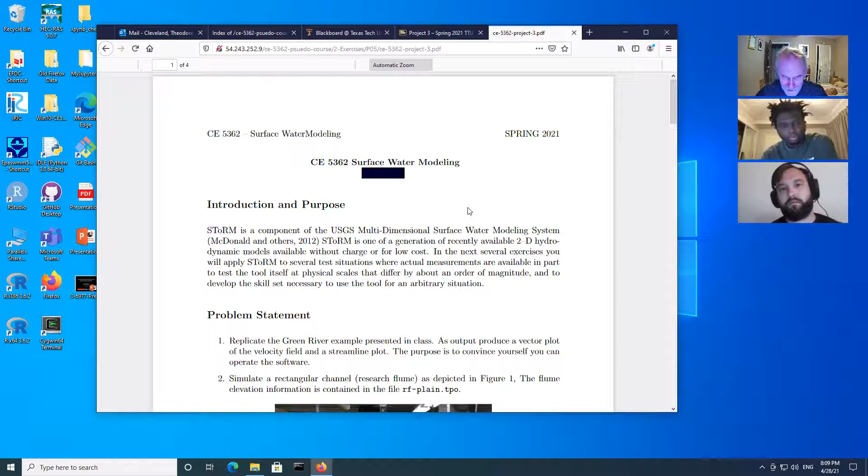So here's the problem statement. I showed you this before, but I've got the date correct, and I have the accounting number correct. So the first thing to do is to replicate the Green River example. And I would suggest not only replicating what I've done in class, but actually replicate the example on their tutorial where they cut the island out, just so you know how to do that. And the purpose of part 1 is to convince yourself you can operate the software.

We had a sequence of things to do. Hopefully I can find it. Oh, rats. Where did I put it? There it is. Dr. Cleveland? Yeah, the protocol for building a SToRM model. There it is. I put this on the look down thing so it gets captured on the video.

Dr. Cleveland? Yes, so I tried doing the tutorial for the Green River. Yes. I wasn't able to do the island stuff. Okay, because I don't know, it doesn't have the cutout in it. I'm not surprised that you can't do it because the software has changed. Yeah, actually. Because they were saying we should use create mesh something, and I couldn't find it, so I couldn't do it. Okay, well, we'll try to take a look at that in a second.

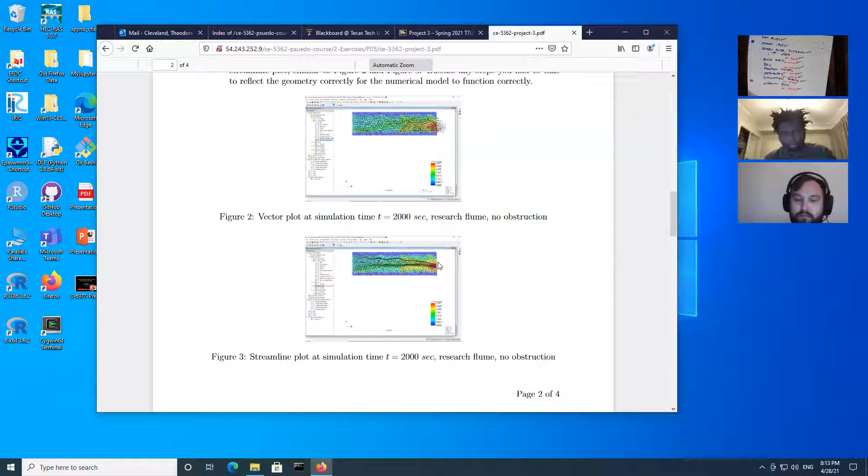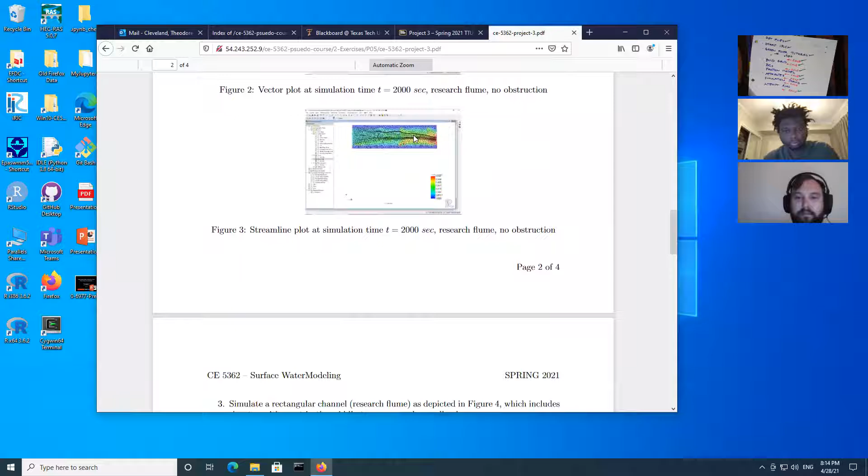And then the second picture down here is showing streamlines. So when you download it, you can zoom in on these. I don't know how to zoom in because I'm doing it in Windows, which doesn't have an Acrobat viewer. And here they are at a couple of different simulations. 2,000 seconds in the research flume should be plenty of time to come up to a steady state. The research flume is only 12 meters long, so that's plenty of time for everything to do its thing.

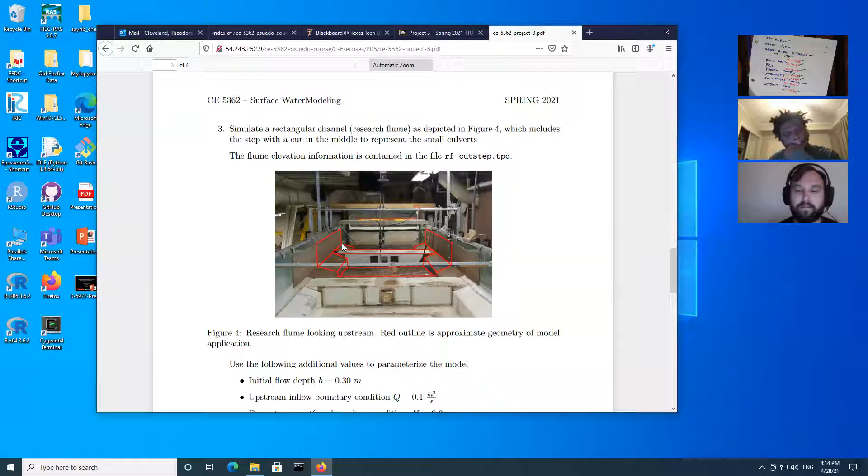And then the next part is to repeat it, except now this obstruction is placed in the way, and to represent the three culverts, because of the way the SToRM model works, this portion is cut out. So imagine it goes like that, drops down, comes here, comes back up, and goes over to the right. And so what you have is a wide portion of a channel, narrow portion, and wide portion. Some additional information for that, and the topographic file is called rf-cutstep.tpo.

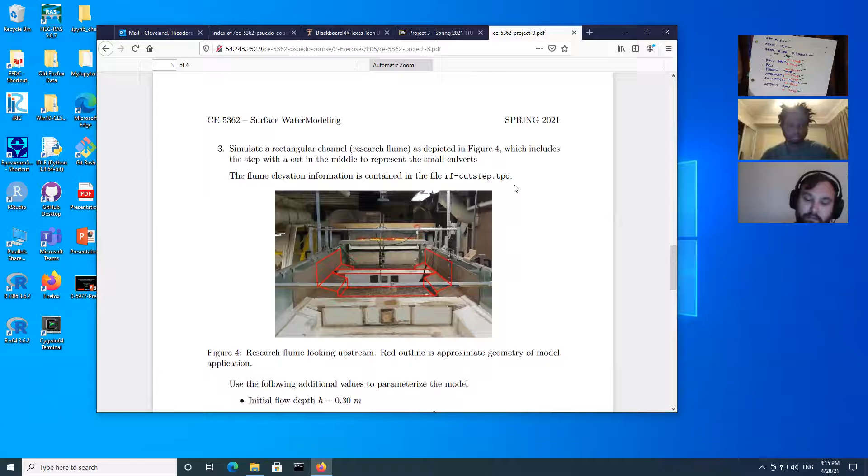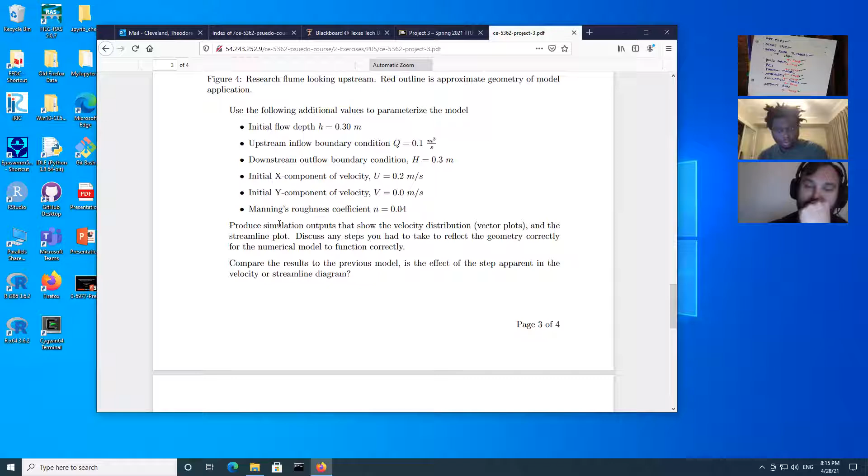And then do the same kind of outputs as before and verbally discuss the difference in the two outputs. So is there an effect of the step on the velocity or not? And so here it is with the step. You should be able to detect an effect of having that step in there.

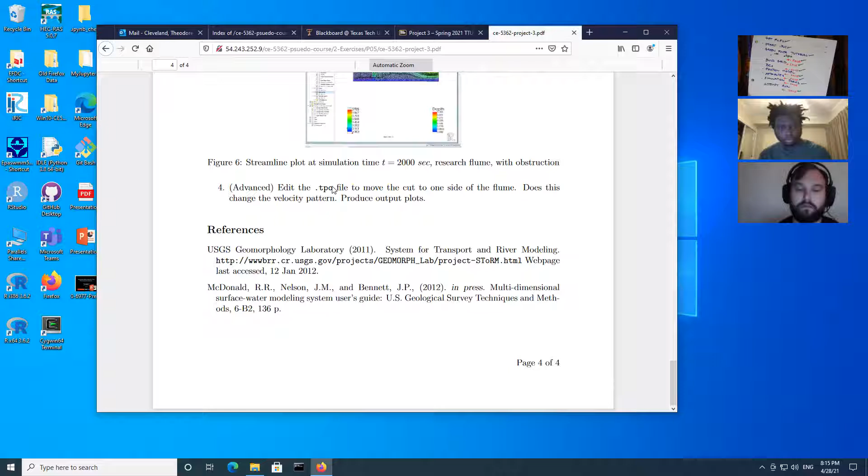And you are free to choose whether to do the advanced thing or not, because we don't have much time left this semester, but it's possible to edit the file, and you can move the cutout from the center to one side of the flume and rerun the simulation. It changes the appearance of the output, and what that does in effect is it's how I would actually simulate this for a real fluid mechanics problem.

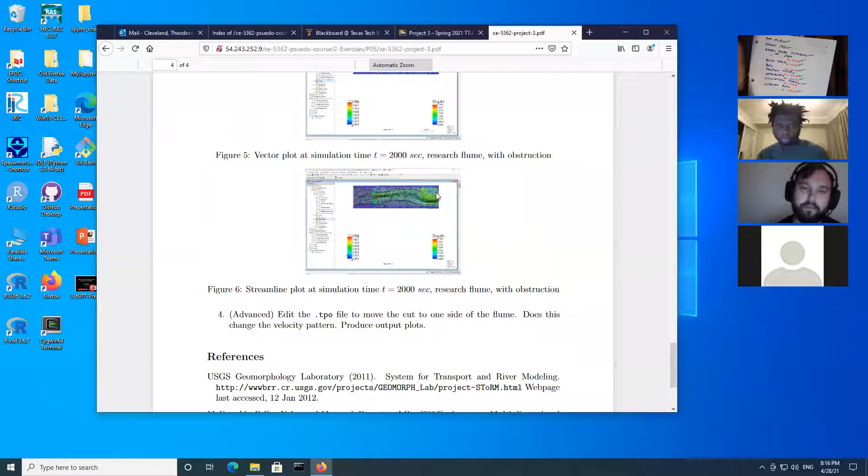We're introducing an axis of symmetry right down the middle, and so we're doubling the size of our modeling regime. 4 is optional. 1 through 3 are what I'm expecting you to be able to accomplish by next week. Okay, is that fairly clear? I'll take silence as a yes, and let's go ahead and be sure that we can do these parts.

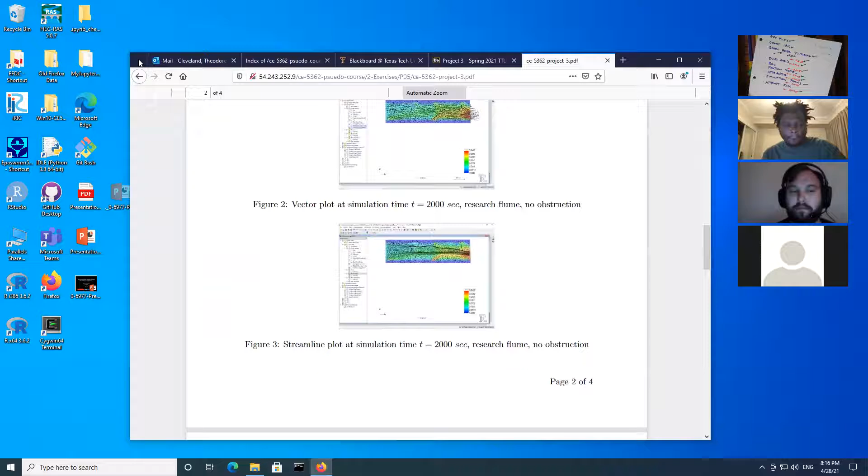So I will return to Anna. By the way, welcome. What I was going through was the third project, which is obtainable on Blackboard, and you upload it here, and it's due on May 10th. We have one meeting next week, and we can use that as a workshop if you give these a try and you're having troubles, and we'll try to fix the troubles.

Okay, so I'm going to do a workshop today to be sure that these data are actually usable, because I did not check that. As I told you all when I started, I was distracted with other things the last couple weeks. No, I will keep the project folders until I know. So first I want to create a new project, choose OK. And I need to download the data. So first I'm going to do rectangular channel.

So rf-plain.tpo, save target as, and let me create a new folder. I apologize for the rather stupid naming, but hopefully that downloaded it. Okay, import. There should be elevation. My rectangle. There's the topographic file. Okay, that looks correct. There should be a way to actually look at each point. Maybe I have to build a grid.

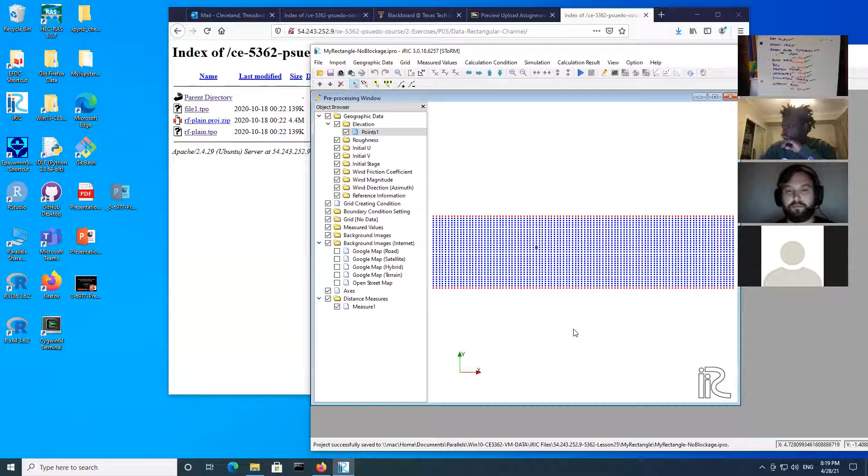So following my algorithm here to the right, I've loaded the topo file. Next thing I want to do is save my file as a project, and we'll call it my rectangle, no blockage. Take it out of context, that's actually a really funny name. Okay, so the next thing is to build a grid. Let me get a little bit more screen real estate. So I'm going to select my algorithm, polygon shape, OK. And I'll define the region.

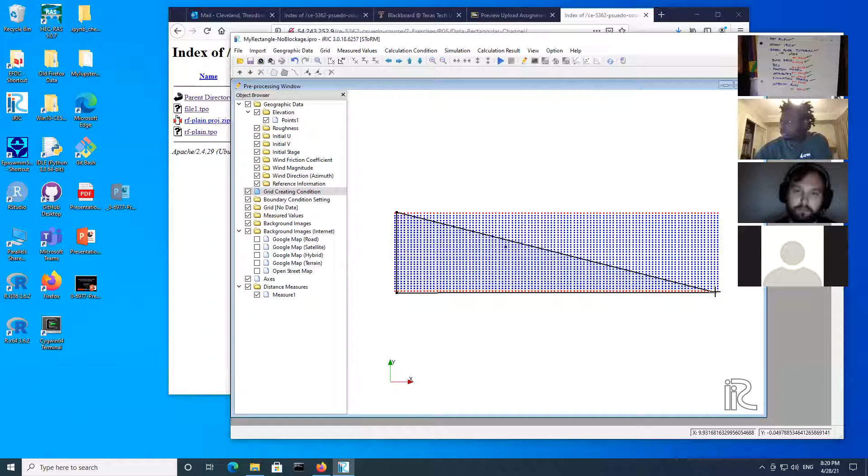Now these red dots correspond to the upper and lower wall, or the left and right wall in the photograph. The program will work a lot better if we include them. And I am intentionally trying to neglect that first column and the last column. Because it's going to do interpolation, we need to give it something to interpolate. So there is my grid. There's no holes in it. We can add a hole. So this is what I think you do to do an island. And that creates a hole. We'll take the hole out in a second.

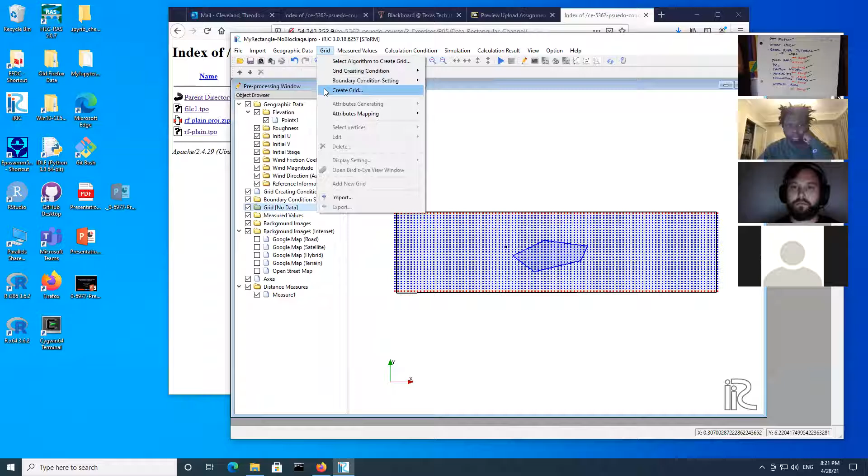Actually, let me see if I can delete the hole right now. Rats. I may be stuck with a hole. We'll do it again in a minute. Go ahead and create the grid. I'm not even going to mess with those just yet. Okay, that's not a very useful grid. I want to get at least 10 cells along the inflow and the outflow boundary. So I'm going to have to redraw my grid. I also want to get rid of my hole if I can. How do I get rid of a hole?

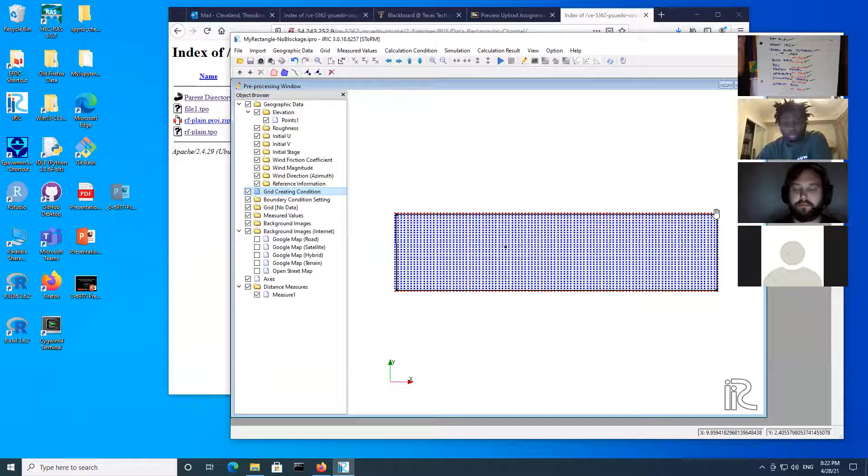Cool. I think that did what I wanted to do. Oh, I guess I'm starting over. My bad. Okay, we'll go ahead and start over anyway. So let me do it correctly. Because it's interpolating, I want to get my boundary just inside my model region. Okay, so there's my rectangular region. Now I want to create the grid. We'll take the initial defaults and see what we get.

I want to count 1, 2, 3, 4. We have four entries along the edge, so we need to make our grid finer. So let's reduce our cell area by a factor of 2. Count again, 1, 2, 3, 4, 5, 6, 7, 8. So we'll reduce it again.

So the reason we're looking for 10, I would love to say it's because I have intimate knowledge that that's what fluid mechanics tells us, but actually it's in the modeling primer that comes from the SToRM website. They're the ones that... so I'm trying to keep my cells as big as I can and get good coverage. 1, 2, 3, 4, 5, 6, 7, 8.

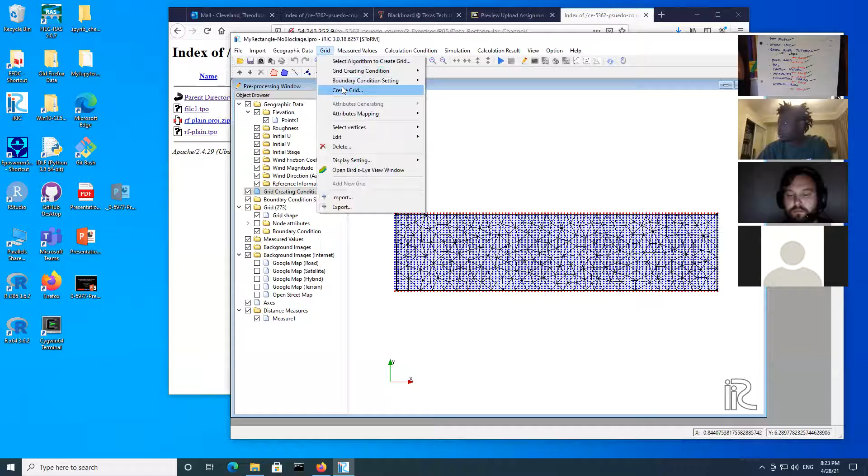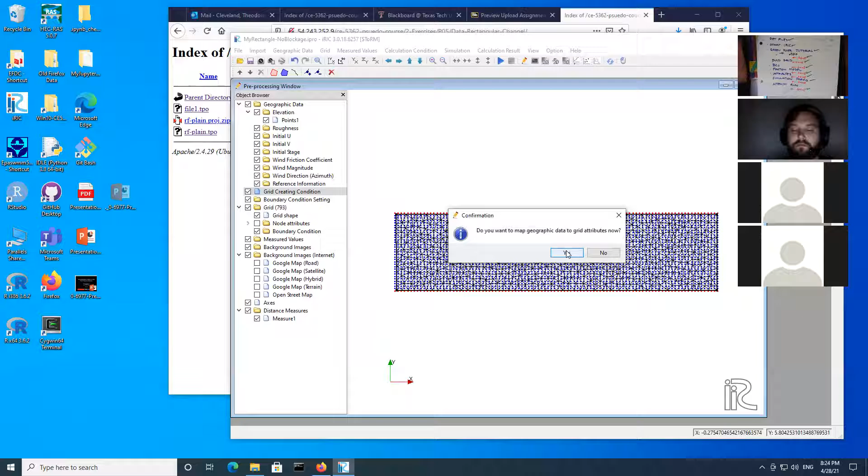One, 2, 3, 4, 5, 6, 7. This thing is really fighting me today. Yay, that's going to be 20. So we'll go with that grid. So there's the grid we're going to use.

The next thing we want to do is boundary conditions. And to do that, we actually probably need to go back to the problem statement. So we're doing step 2 here. So the initial flow depth is 0.3 of a meter. The upstream boundary condition is 0.1 cubic meters per second. I happen to know that this should flow from left to right. But let's verify that.

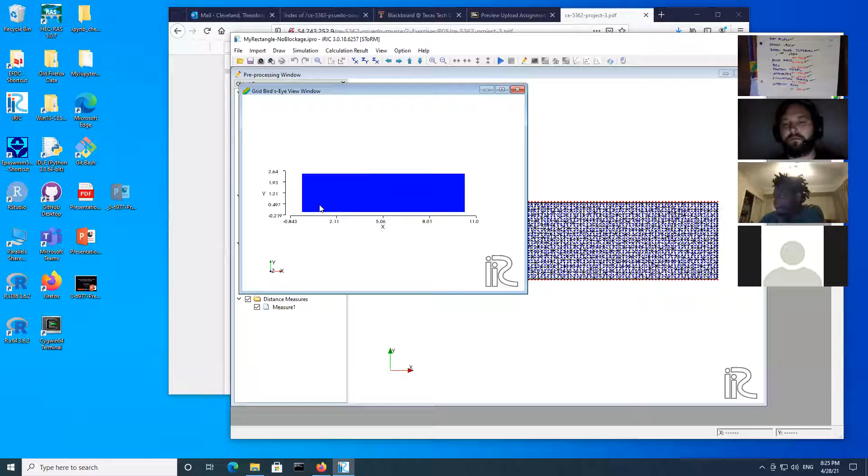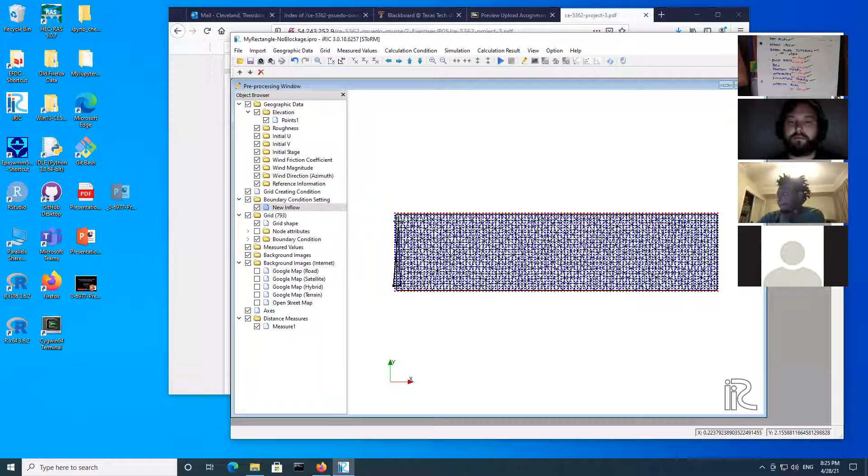I do currently have a bird's eye view window. I'm trying to rotate it so I can see which way is down. I'm pretty sure it's from left to right. So we're going to make this left side our inflow boundary. So to do a boundary condition setting, we go to that and we're going to go to the add inflow. And I'm going to try to miss the corner, but I want to get the interior points. And I'm basing my drawing on the triangles right now. And we want to make it 0.1.

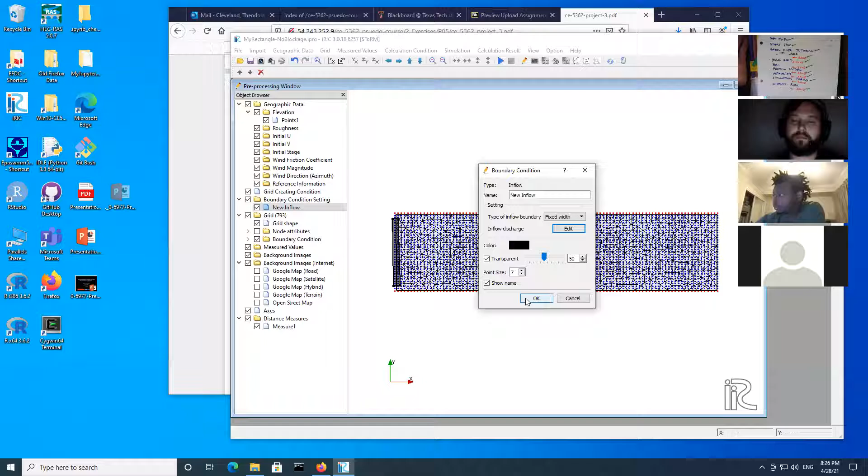So now we will pan over to the other end and we'll put our outflow condition, and then the outflow we're going to specify a flow depth. So we'll go to outflow, and I'm going to play the same game. Zero point. Come on, machine. Downstream outflow condition 0.3 meters.

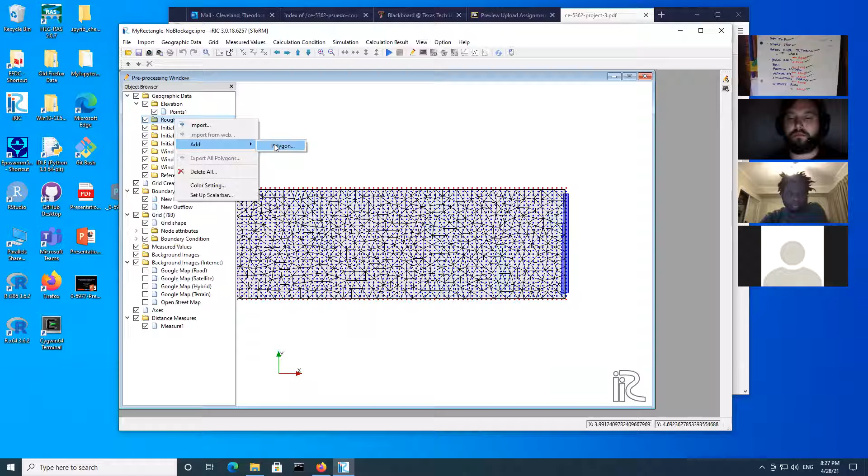So we've got the inflow and outflow boundary conditions, and according to our thing, the next thing we want is a friction model. Zoom out a bit. So I'm going to try to get a friction model more or less coincide. Actually, I guess it doesn't matter because it can interpolate. And let me see what roughness values I want to use. 0.04.

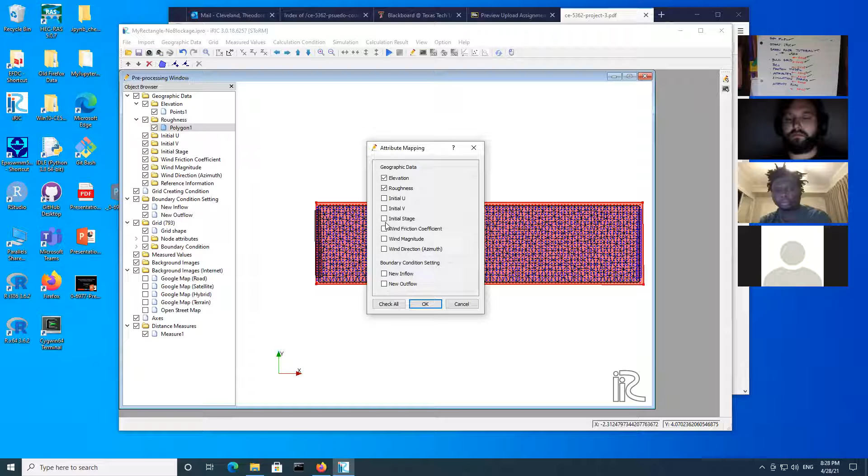So the friction model is there, the boundary conditions are there. I'm going to go ahead and save the work. And then the next thing we do is we map the attributes. So we go back to our grid, we go attribute mapping, and we're going to put elevation and roughness onto the model. We could also put initial stage, which I haven't defined yet. We'll put the inflow and the outflow. We'll click the okie dokie, and it claims it has done it successfully.

And at this point, we're ready to set up some simulation parameters. So let's go ahead and do that. We go into the calculation conditions, and we're going to set up the initial conditions from uniform conditions. We'll go back to our problem statement. So the initial x component velocity is 0.2 meters per second and y is 0.0. So we go to 0.2, 0.0. Water surface elevation is 0.3 meters. We'll leave that as is.

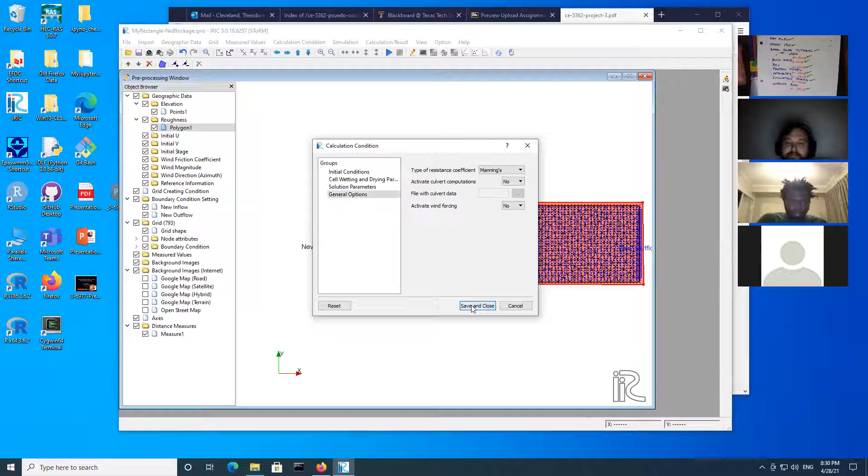This is actually pretty small scale modeling, so we may have to use a fairly small number here. I'm going to try microseconds. I'll do about 100 time steps. I'll plot every 10. This is just to get things up and running, make sure it's going to work. And then general options are fine. And at the time we did the data, the ability to do culverts wasn't coded into the program yet. So I will save everything, and let's go ahead and run a simulation.

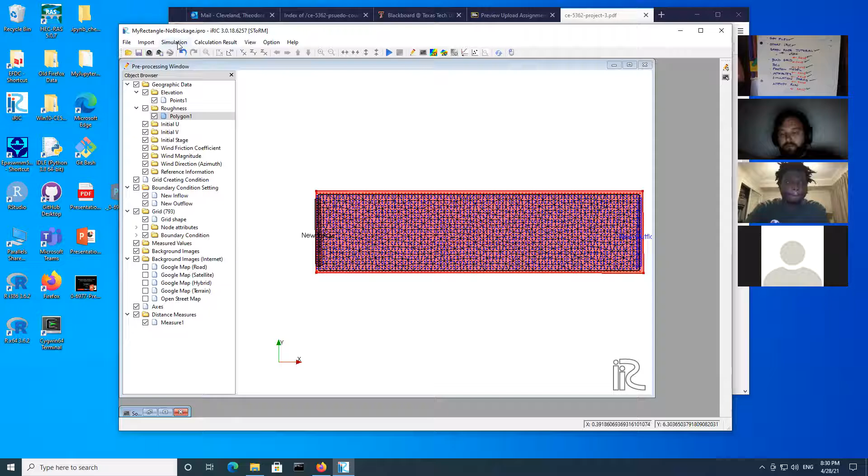Okay, that was a desirable run. 100 time steps of 1 millisecond isn't very much time. That's 100 milliseconds, which is 1 microsecond. Excuse me, 100 microseconds is 1 millisecond. Takes a little bit longer than a millisecond to get from one end to the other of this flume. So now I'll go ahead and, just for grins, we'll go look at the output real quickly.

The velocity arrows are as expected. If we were to rescale, there was the initial velocity condition, and for the first 100 seconds of simulation, it's trying to hit a steady state, but you'll notice that this upper portion and this lower portion have zero velocity because there's no water there.

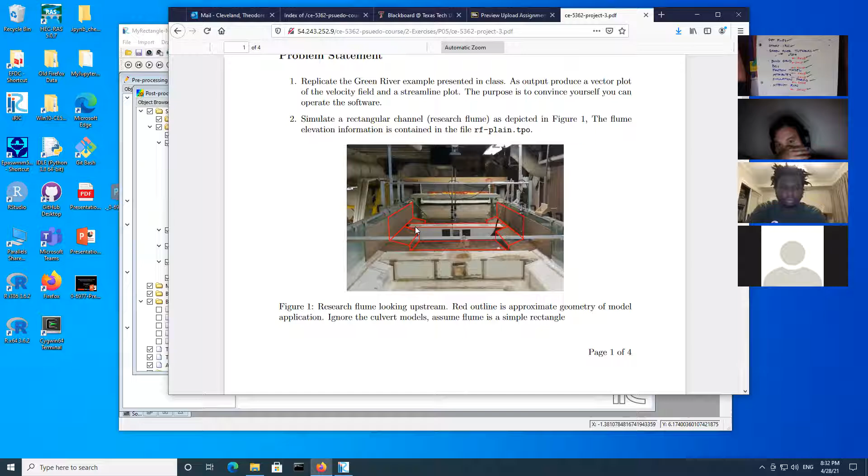If you remember from the photograph, the sidewalls are slanted and then drop down vertically. So at these particular flow conditions, the water is completely contained in the pilot portion of the channel. Going back to the picture, our initial conditions have everything contained between these two walls, and so these benches are not carrying very much flow yet.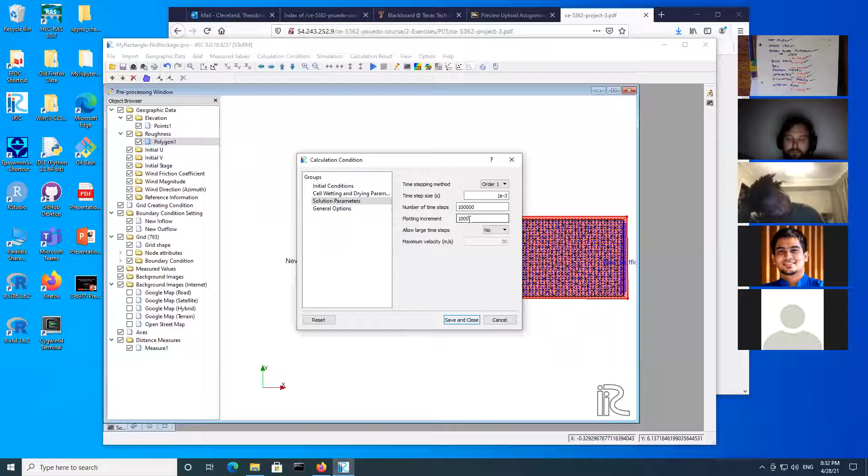So the next thing we would do in this case is modify our solution parameters. I'm pretty sure this is a small enough problem that we can get away with what I'm about to do. That'll be good, and I'll let it run.

And it's grinding away. I may have set up conditions for failure because this number is starting to get high—right now it's at 17, 20. I think it'll make it. I think we'll get to the end.

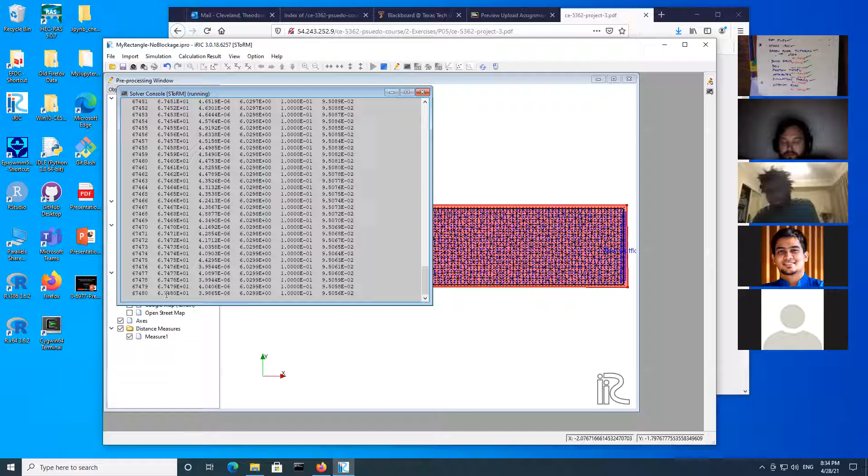When I use this tool a lot, I did a lot when we were doing these experiments, because it lets you visualize computationally the effect of obstructions, things like bridge piers, culverts. You could put circular objects in it and visualize the flow field. Then we went to the laboratory with an underwater camera and other visualization techniques, including the highly sophisticated thing of putting food coloring in the flow field. We confirmed that the computational visualization and what we could see in a real experiment were remarkably close—close enough that in relatively simplistic geometries, I have faith that the SToRM program produces adequate visualization of what the flow fields look like.

I wouldn't trust my life on the numbers, because only a fool does that, or an astronaut. But I was able to convince myself that the tool is actually what it says it is.

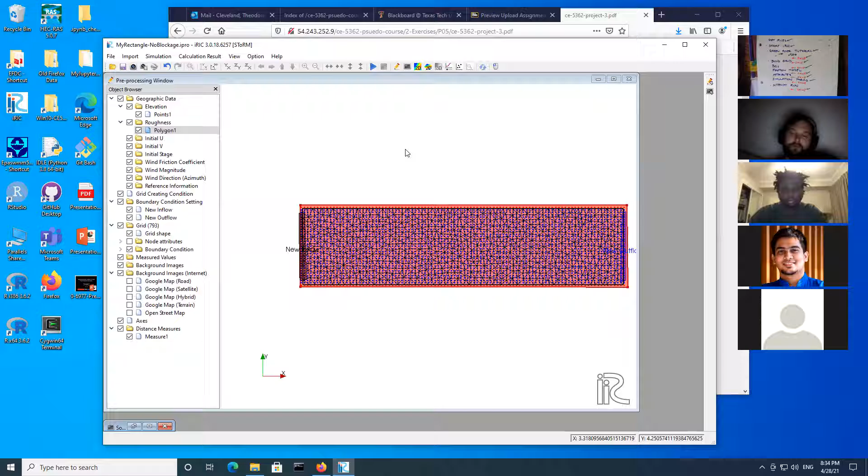Okay, so I've simulated—I think I've done 1.5 simulated minutes, and I know for a fact that even at a flow of 1 foot a second in that particular flume, it would only take 48 seconds to transit the flume. So I'm pretty sure that we are at a position where we would indeed have a resolved solution. Let's first just look at some interesting, pretty stuff.

There's the water surface elevation, and where it has high numbers is essentially our dry cells. Down here in the dark blue region, somewhere around 0.3, it's a little higher than 0.3 meters, which is about correct for those conditions.

If I turn on the bed shear stress, the image should look the same as the one I just showed, and most of the bed shear is going to occur in the center line of the channel. And sure enough, it does. We have the highest shear actually near the end of the channel, so the water is squirting along here and starting to pile up at this end. If we had the ability to resolve velocity down here, we'd see it's slightly slower on the right end than on the left end.

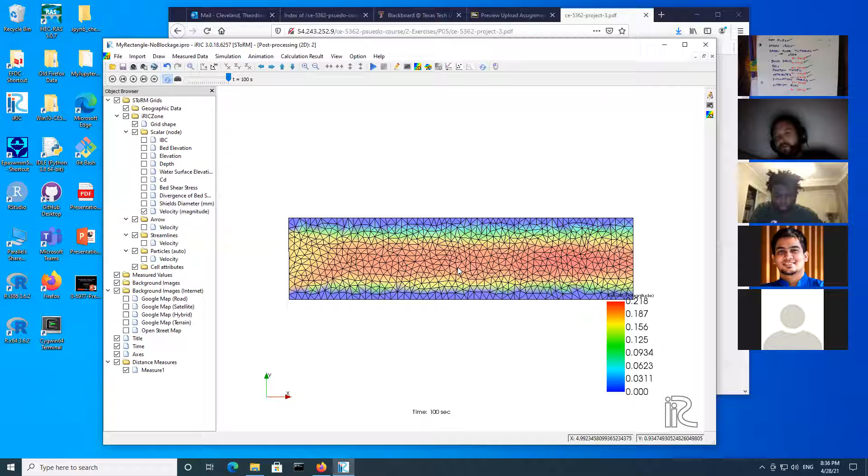We could turn on velocity magnitude, which is the square root of the sum of the squared velocities, and we should almost deduce the same thing. It's barely detectable in this imagery, but it's faster here on the left than it is on the right.

Let's go ahead and get the velocity arrows, because that was the whole point of this study. If we choose the property, let's just shorten these arrows, so 0.1 meters per second is going to be represented by 100 pixels.

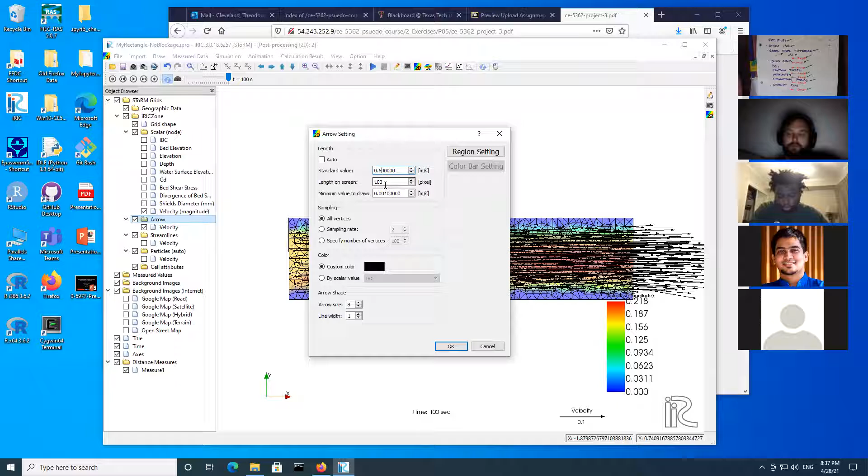Okay, that's what I wanted to see. And actually, turn off the grid. So there's my velocity field at 100 simulated seconds.

We'll go ahead and run the time steps through, but keep in mind what's happening: we've produced an initial condition that may or may not be an equilibrium solution, and so the time step algorithm is working through time until things stop changing. Actually, that happened remarkably fast—it was doing that last time, wasn't it? Boy, I hope I saved everything.

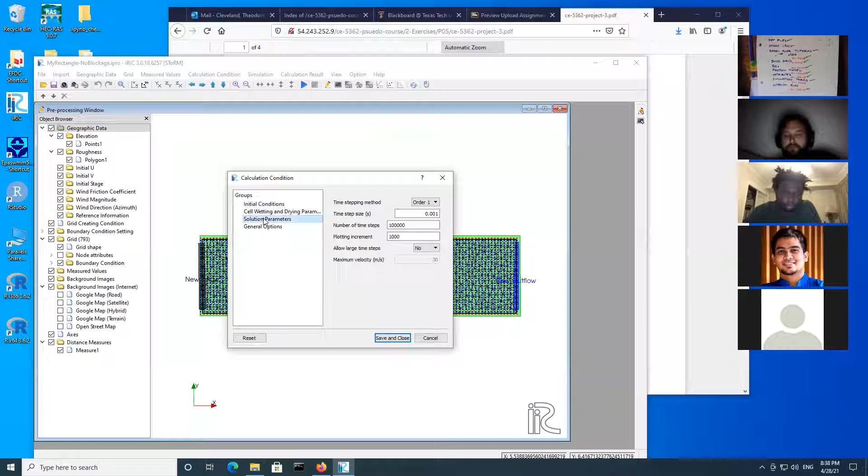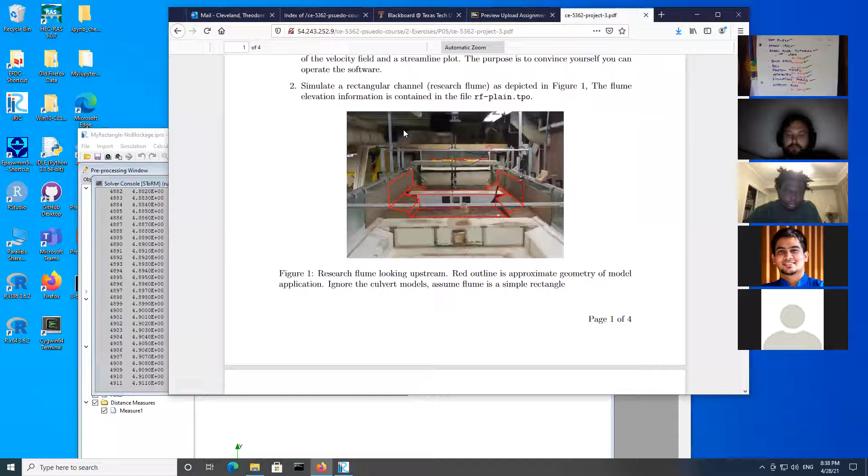Okay, this time I'll do it correctly. I'll let it run in the background. And while that's backgrounding, I'll look at the second case. So the second case is going to take very similar information. When it's done, we'll figure out how to do the streamlines and the particle tracking.

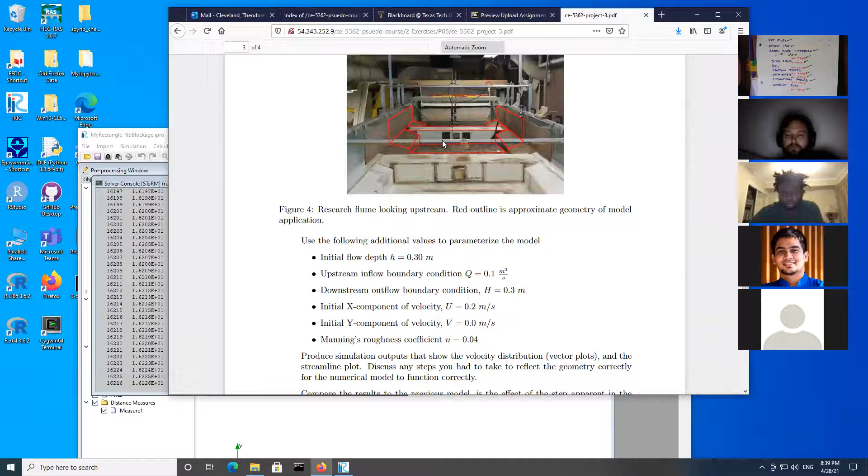The second case is the same thing, except now this object is in the way. Nothing changes in terms of the x and y component of velocity. So one of the tricks we're about to explore is if we can just make a duplicate of the project and then change the topo file that it uses.

We'll be there, we're 40% done with the simulation. And that is all that project for homework involves. So let me get this thing done.

Come on, don't crash. Well, it didn't crash last time, so why would it crash this time? What could have possibly changed except for a few minutes of our lives? I say that with a necessary degree of skepticism based on past experience. I'm still confused why it crashes a lot. But considering what we paid for it, out-of-pocket cost, we paid for it plenty as taxpayers.

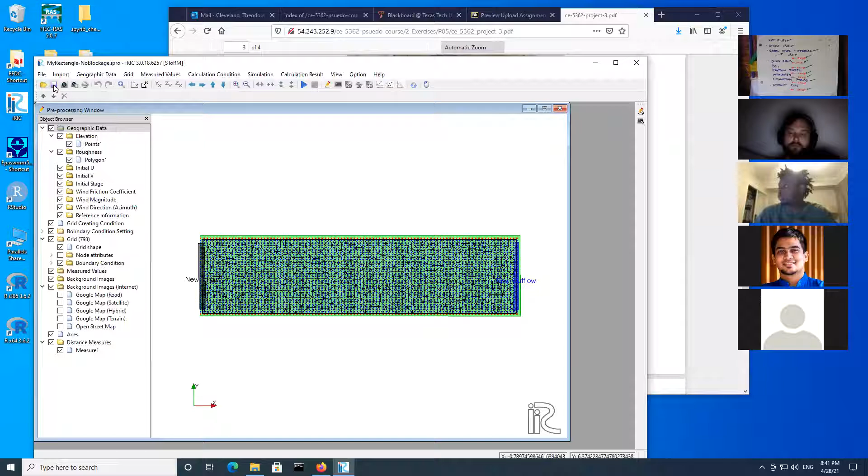Okay. I wonder if my virtual machine is running up against memory limits.

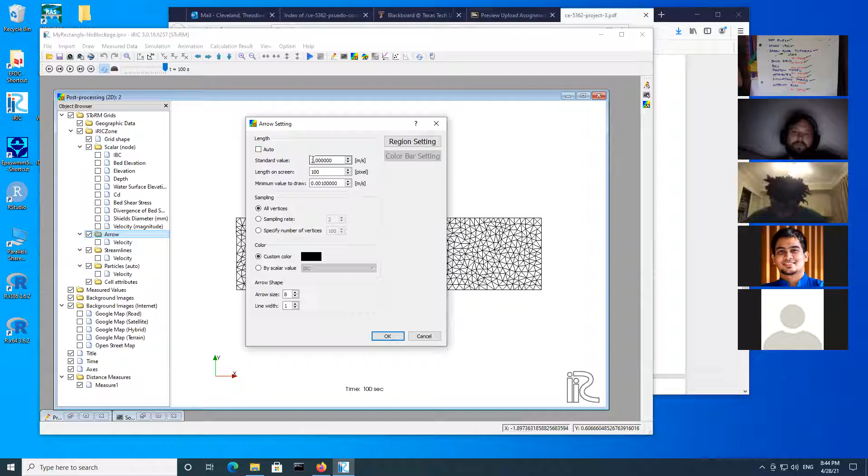Okay, there is my flow field. Let me turn off the grid temporarily. So that's what my flow field looks like. What I'm interested in is generating streamlines.

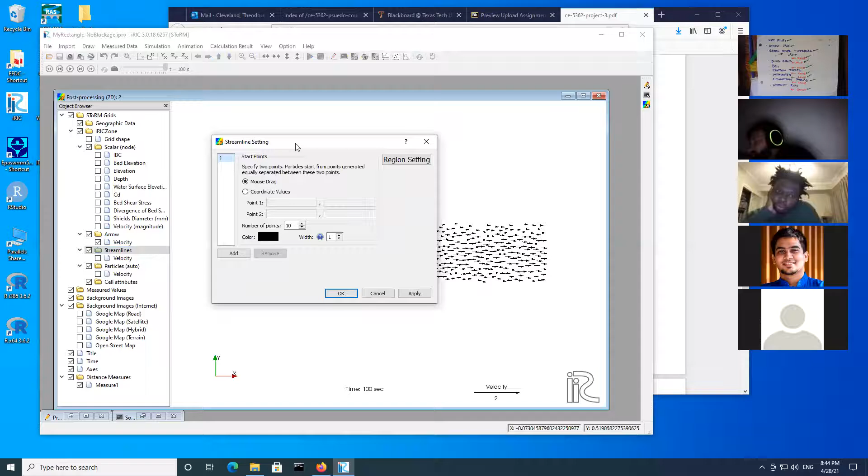And the way we do it is we turn off the velocity arrows. And so now we have generated streamlines. And they change with time step. And so all this is supposed to be steady flow conditions.

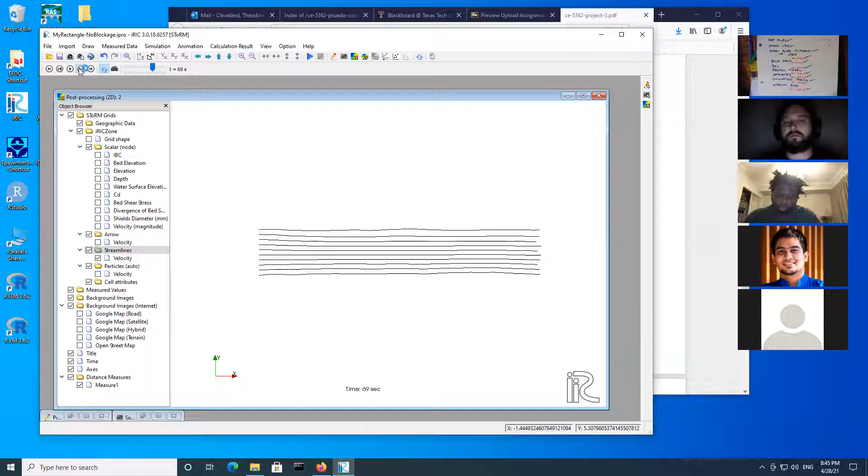So after 40 seconds, it should get pretty stable. So there we are, about 40 seconds, and the streamlines are mostly staying put. And in the real... shiza, that's okay, at least that was saved.

Try that again. You may not have that issue on your computer because you may not be hitting the memory limitations.

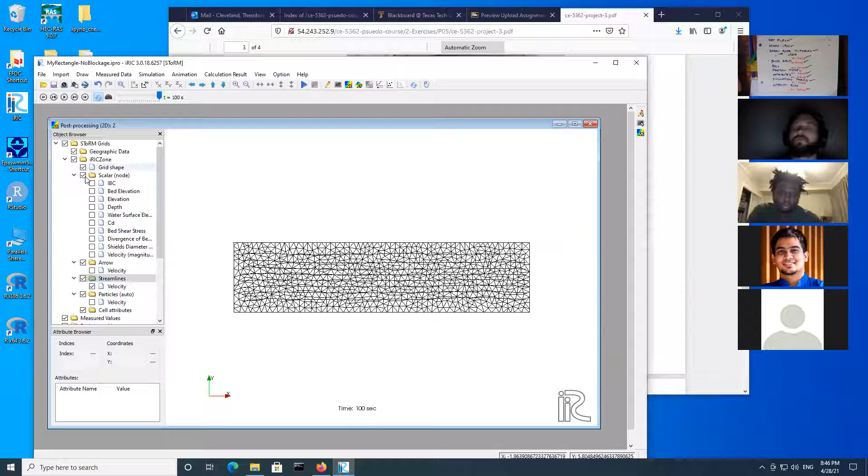So about 40 seconds is where I think, in this particular physical conditions, things should start to get kind of stable. And so, as threatened, at 40 seconds everything's kind of staying put. So that's how you can generate streamlines.

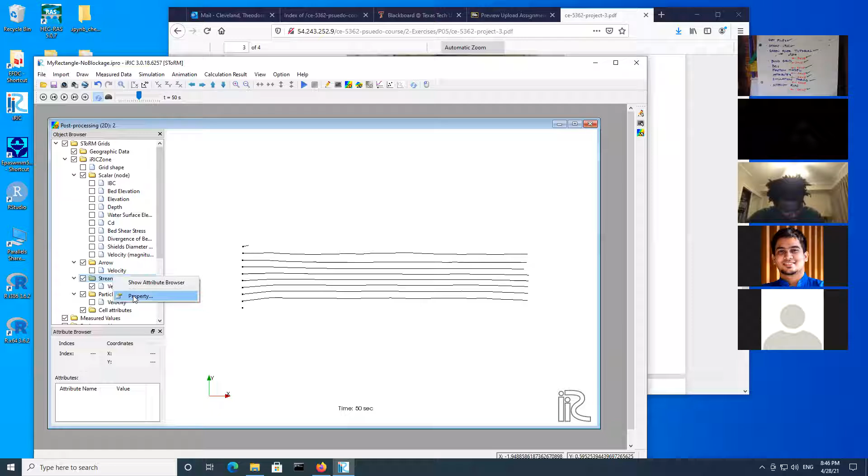You can actually increase the number of points in a streamline and get higher resolution, which in this particular example isn't very interesting. There's nothing to be gained, but if there was a lot of curvature in the system, seeing where that curvature goes is pretty interesting. The other tool that I think is really quite fascinating is a particle tracker.

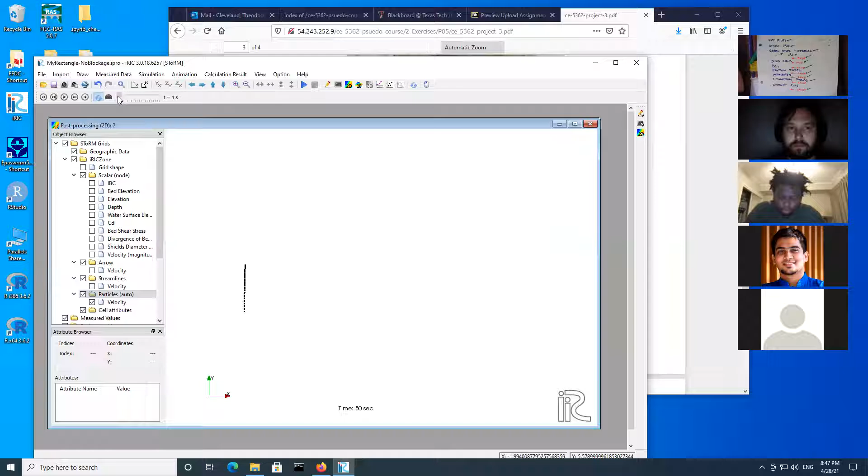And in the same way we added streamlines, we can have it add particles. We'll go back to the first time step. And if you recall in your fluid mechanics class, what we're producing right there are streak lines.

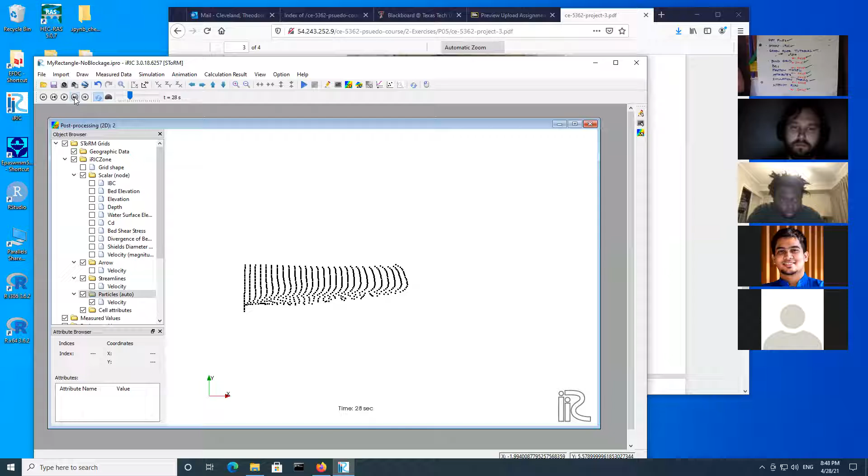So at the beginning of each time step, a row of particles is introduced into the flow field. And at around 40 seconds, again, it should start to kind of look fairly constant.

And I find it fascinating that this lower part here is somewhat disturbed flow, as on the upper edge, on the edges, for something that I think should be more symmetric than that. If I turn back on the grid, we can see that my drawing of the particle region wasn't as good as it could be.

We don't have any information coming up here, but we can see that the main flow is going right down the center line, and we start to get mixing along the edges, which in the real model was a real thing that we could see.

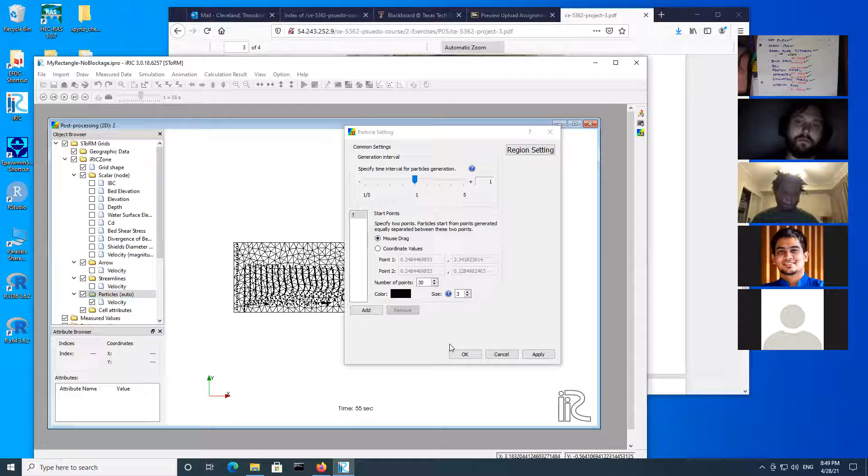I'm going to go ahead and redraw the particles. And let's go like that. Apply those, choose OK. Go back to time step 1. And what the particle field should look like is a flow going down a tube. Because that's really all a rectangular channel is, a tube that's square instead of circular.

And from this, you can see where the high flows and the low flows are in terms of two-dimensional velocity field, exactly as one would anticipate. Most of the mass flow is going down the center, and there's not much along the edges.

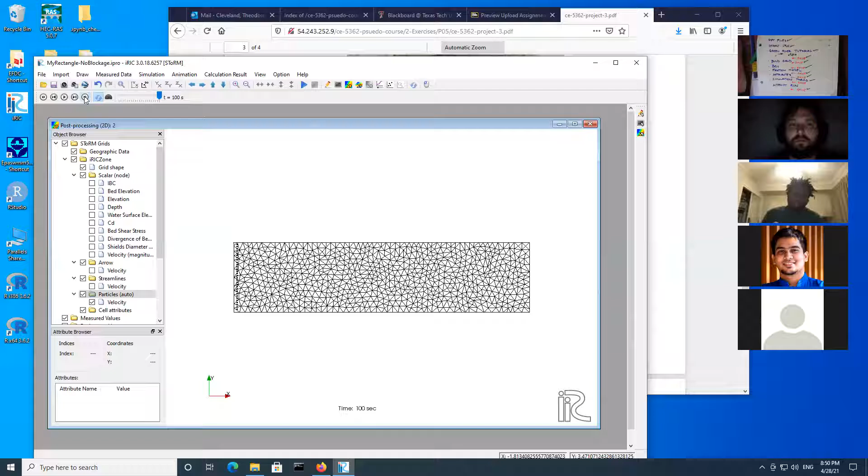Oh, I keep forgetting it renews it. We'll go ahead and let the animator go. Well, that was cool.

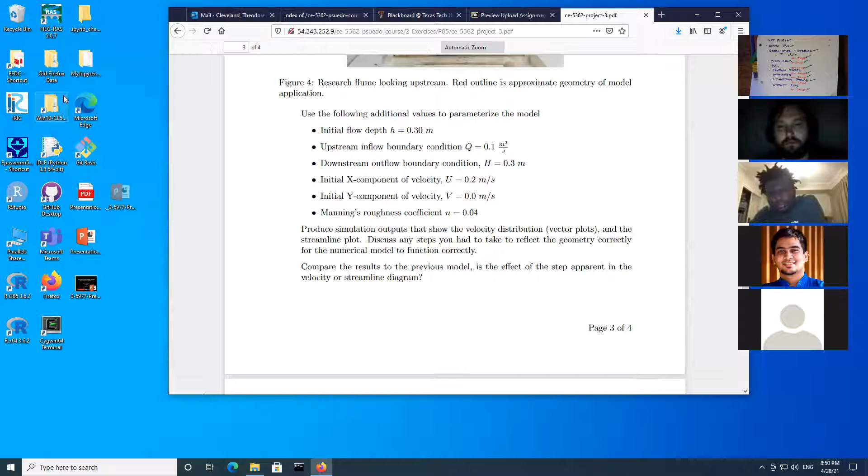The next problem, and again, I hope yours doesn't crash as frequently as mine, is the same thing, but we're going to use a different topographic file. So I'm going to attempt to...

So that data is all still there. Damn if I know why it does that. Okay, I want to view the object browser. So there's our usual setup. I'm going to attempt to save it as a different project file, and this is going to be... so I haven't changed anything. I've just created what I hope is a duplicate.

And now what I'm going to do is on the elevation, I'm going to add, no, import... stop, need to download the file first. So with the obstruction, I'll just save it to the same place. And now we want to...

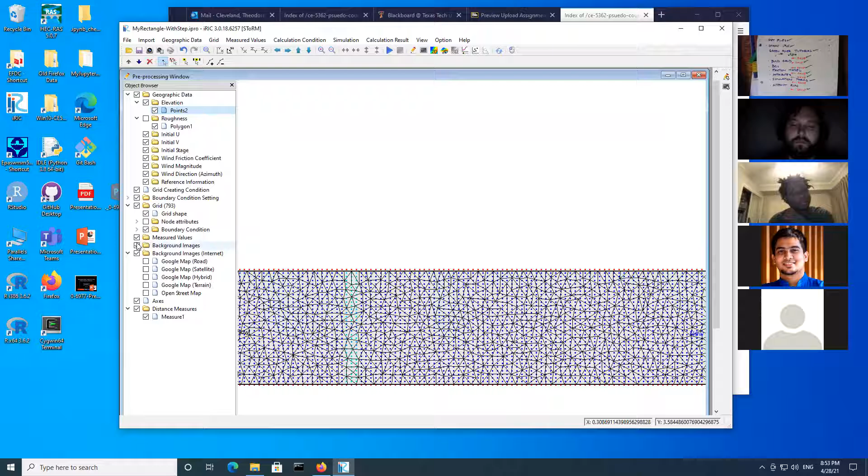So you turn off the grid. There we go, there is our plan view of the object. The dark blue, as you recall, is the lowest elevation. Light blue is a little higher, and the red were the sidewalls. So this is representing that water crossing with a cutout in it. Think of this as a nozzle, the flow would come here, and it's going to have to get some fairly high velocity in this region to get through that area, plus whatever goes over the top of the step.

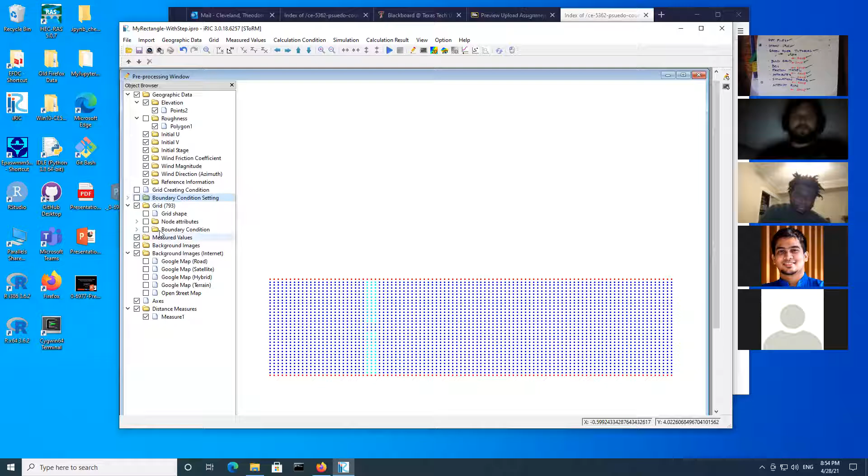And so now I want to, okay, grid's been created. I need to map elevation, roughness, inflow, outflow. I think that's all I need. And then let me check the calculation conditions, uniform.

All right, and we will run that. With any luck, we have saved the problem of having to redraw the various polygons. Let that do its thing in the background. No point in me opening another instance, it'll just crash. So I think the crashing is a consequence of not the actual simulation, but me saving too much output files, and my computer can't manage it.

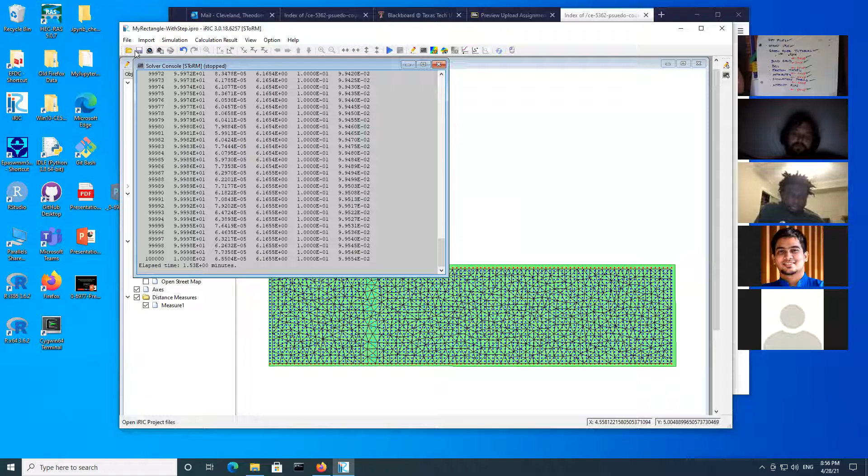All right, so if it crashes, no big deal. We can actually just reopen the... that's weird.

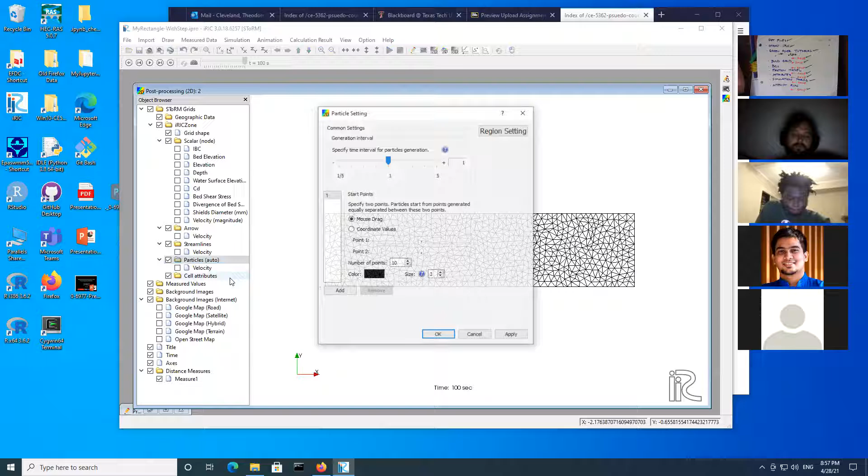So I'm going to go straight to the particle tracking. We'll go ahead and put that in. We'll put in 30 points. I'm picking 30 just completely arbitrarily. We'll run them along that edge. Apply, okie dokie.

So it doesn't look much different yet. Bear in mind the step is right about here. So it's accelerating through the slot.

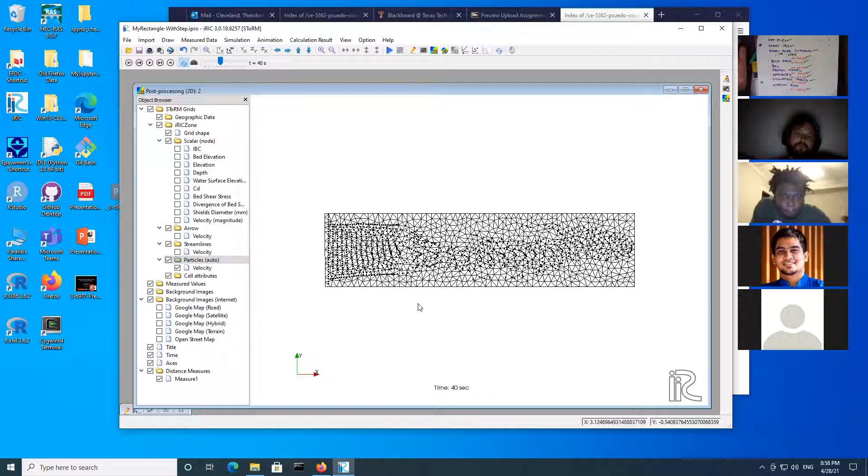And then it's getting this S-curve shape, which I never quite... again, my intuition tells me it should be more symmetric than that. But Alariza had a good observation from, he's done similar simulations with a different CFD software. And what he's observed is that circulations actually start along the edge. And that's what causes this tail-wagging effect that we're seeing.

So if we turn on the velocity magnitude, we can immediately see the impact of putting that obstruction in a slot. It actually behaves just like a jet nozzle. We can see the same with streamlines. Let me turn off the particles so they don't get in the way.

So the way I'm doing it is I'm right-clicking on the thing and I'm choosing the property editor. And then I draw where I want the streamlines to be. I choose apply and then I choose OK. And so the streamlines are...

Yes, cat, what is it? I know it's time for you to eat again. It's been almost an hour since the last time you ate. I'll be with you in a minute.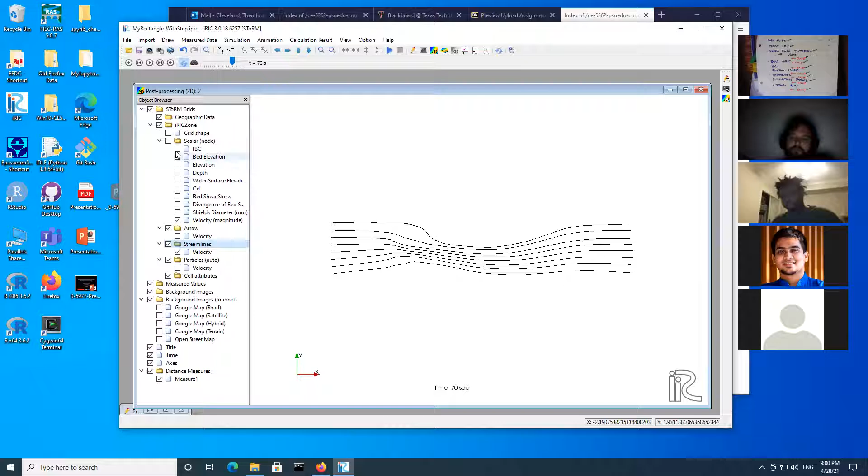And so with the step in there, it has an impact on the streamlines.

And that's all you're to do for this project assignment. So I'm convinced that the data are downloadable and this assignment is doable because I've just demonstrated the technical work involved. And what you would have to do for your exercise is to replicate this and go ahead and screen capture and produce a short write-up on what you did. And in particular...

You all missed that, I have a cat in my face. I'm going to share with you.

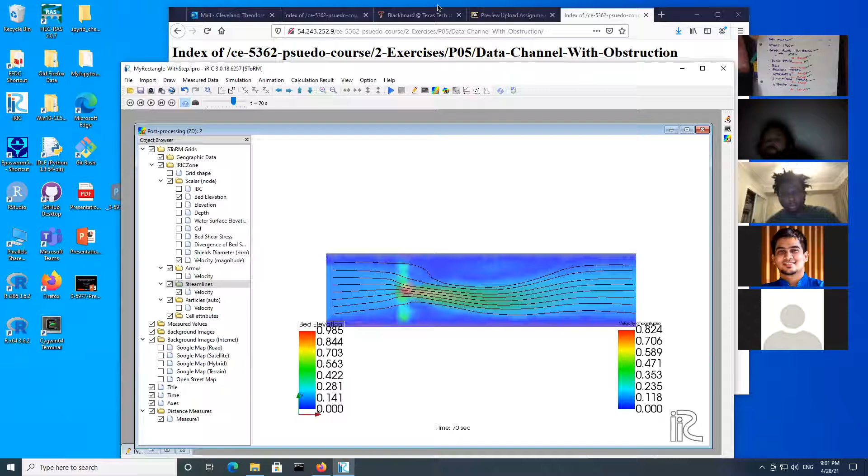There we go. There's his ears, one ear, two ear. And he is now demanding complete attention, as cats will tend to do.

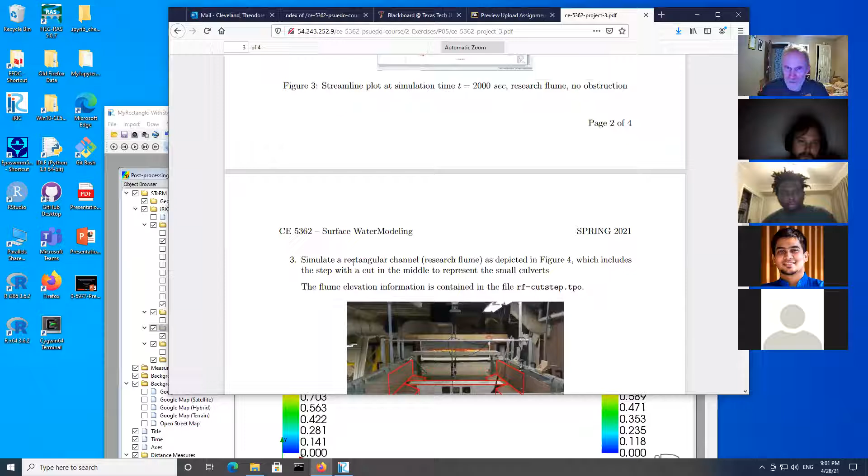The write-up is probably about like this problem statement, 4 or 5 pages, screen captures, and then address in a narrative the steps you took to reflect geometry, compare the results, is the effect of the step apparent with a velocity or streamline diagram. And that would conclude your project number 3.

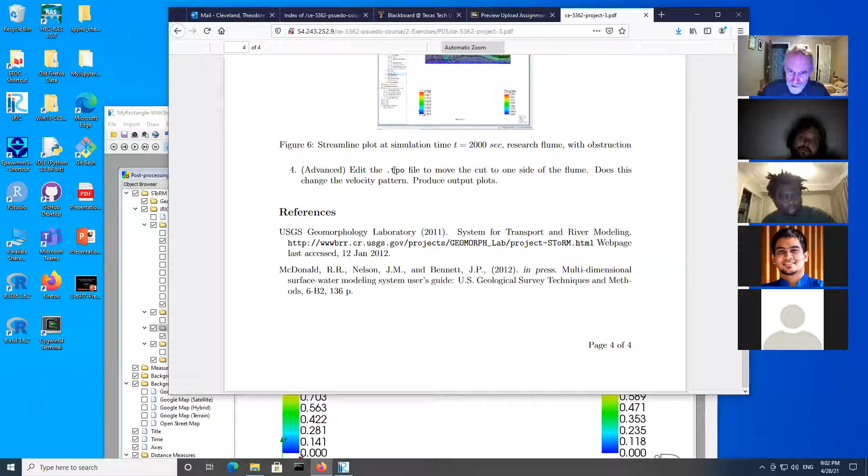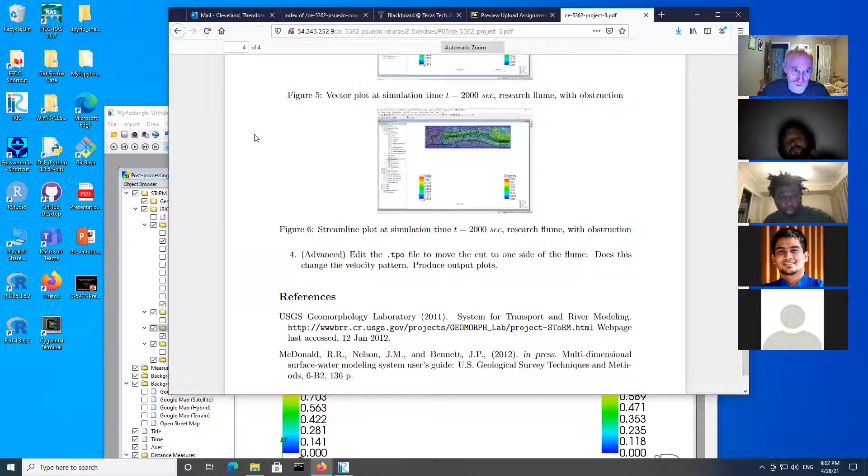If you're feeling frisky, you can try editing the .tpo file to move the cut from the center line to one side of the flume and see what effect that has. What that does is it pushes the nozzle up to one side or down to the other, whichever way you move it. And to do that, you'll have to look at the contents of those files and decipher the coordinate system. So the first is X in meters. The second is the Y value in meters.

So the flume is about 2.5 meters wide. And then the side walls are set at 1.2 meters above the bottom of the flume. It looks like this is done as a flat flume. So everything is held to 0, which is not the real one. The real one has slope to it. But the whole thing at the far end is 10 meters long. So you're modeling about 30 feet by 8 feet.

What do you want, cat? That does not look comfortable to me. There you go. That looks comfortable. It should be on the keyboard now.

So does that clarify the final project for the class? I will take silence. Yes. It's probably a yes. Yeah.

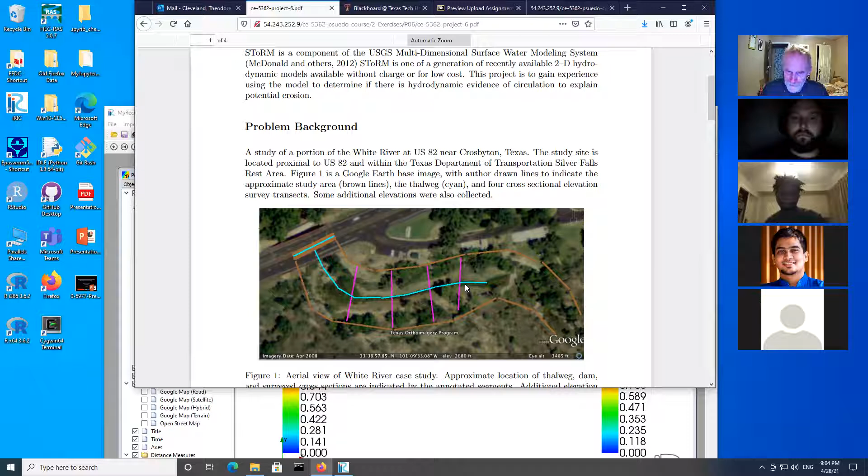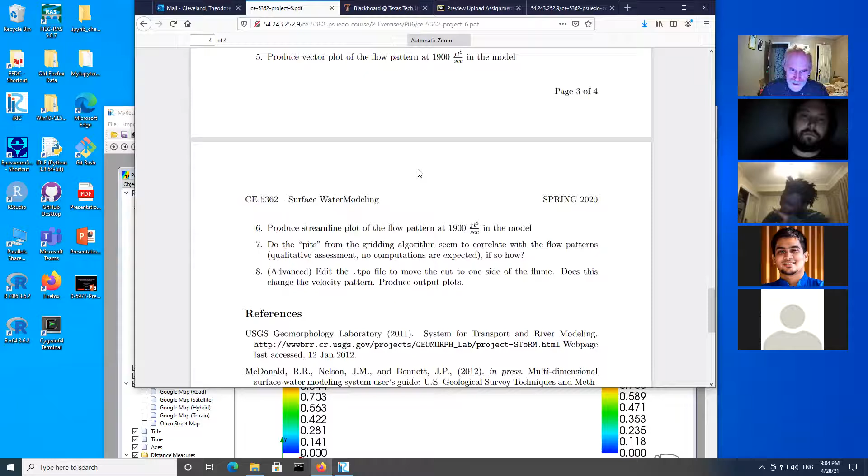The one project we won't get to do is, this was when we learned SToRM, what we used it for. So here's a real stream, not far from here in Lubbock, 30 miles away. And we had to build a topographic model from scratch, put in some conditions, and actually do some real analysis. And what we learned is a couple of very important things.

So if all you have are cross-sectional data, you can certainly build a two-dimensional model. I mean, the software doesn't care, but you need to tell your client that the lack of information between the cross sections contaminates the two-dimensional representation of the system, and our choices are to actually get real data between the cross sections. That would be the best thing.

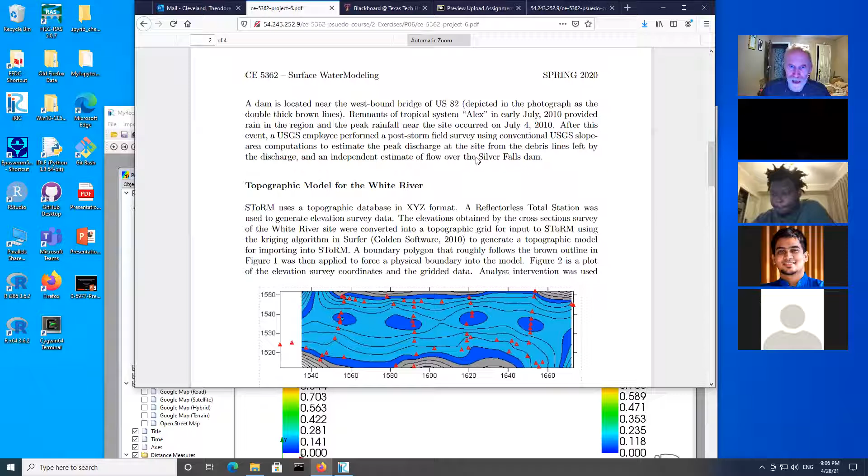The other choice is we'll have to come up with an interpolation scheme external to the triangular irregular network scheme and populate these regions between it with, well, fake data is what it is. We have to produce artificial topography between it. And we would not have known that until we did this on this real case. So two-dimensional modeling, to do it well, has an extremely high elevation data requirement that until you've done it, you would be unlikely to notice.

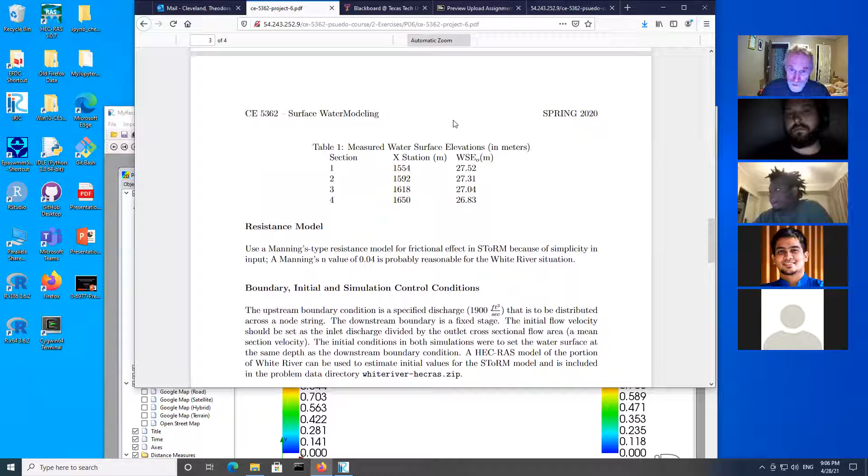We don't have enough time this semester to complete this. What I will do is I'll find the paper that was used to generate this particular problem, and I'll present that next time.